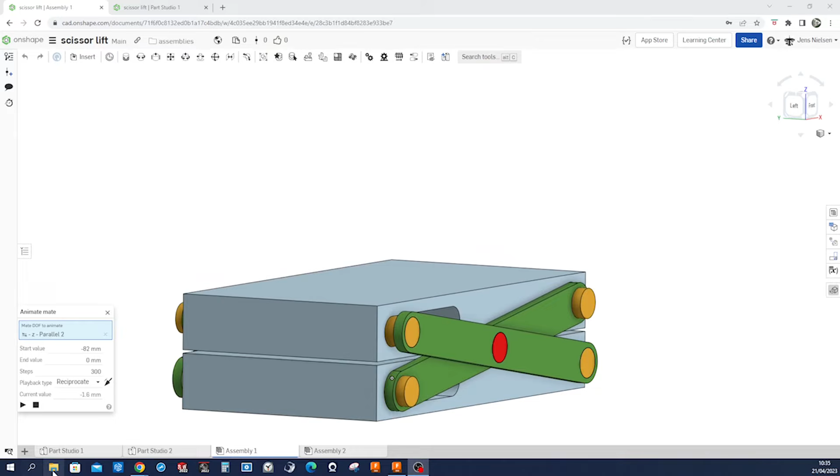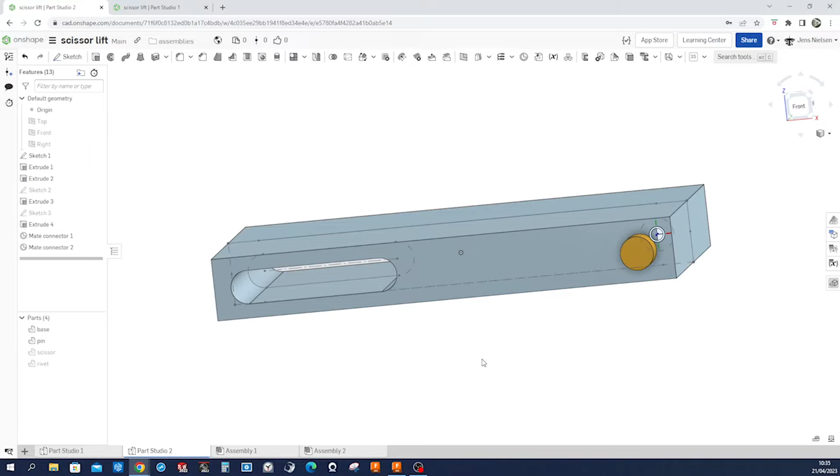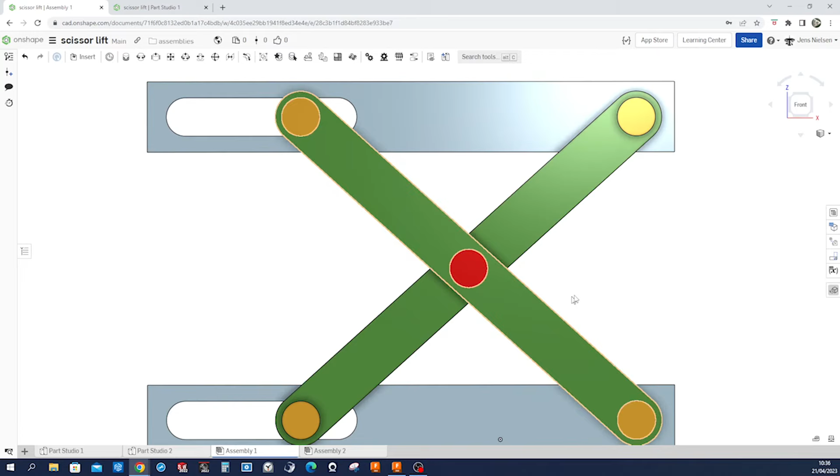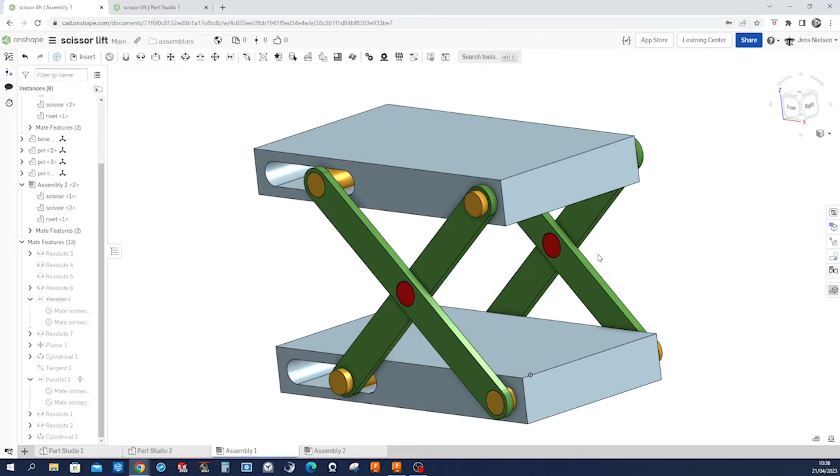Hello, let's model this scissor lift in Onshape. We will start in the Part Studio with simple sketches and create those 4 parts: the base, the pin, the scissor, and the rivet. Then we will go into the assembly, assemble those with plenty of mates: revolute, parallel, planar, cylindrical. Then we'll make a sub-assembly of those 3 and insert that at the back, and define the motion with a distance mate and parallel limits. We will define limits and the parallel mate.

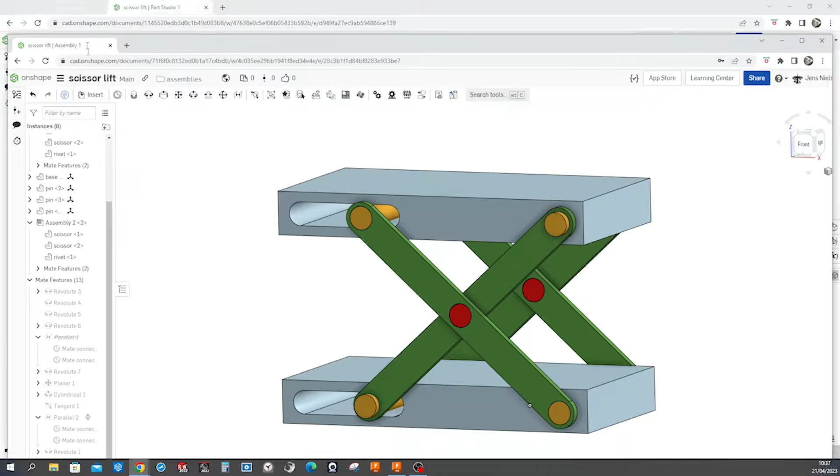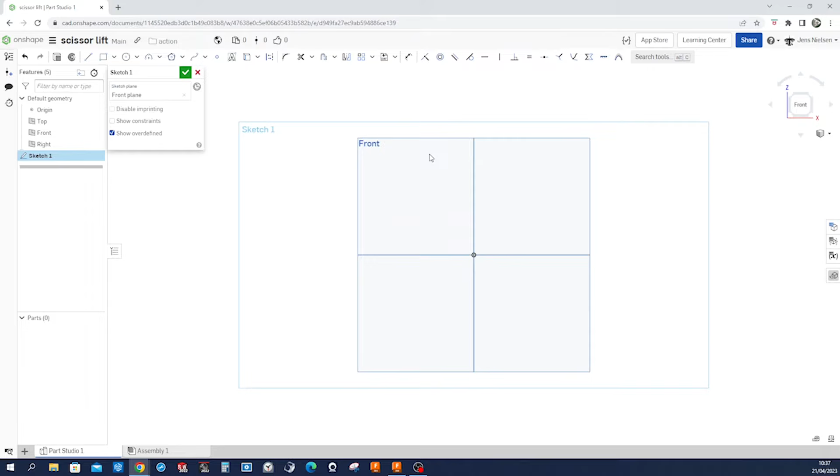All right, let's start in the Part Studio with that first sketch for the base. So I start a sketch on the front plane, N normal to that, P to hide the planes, and then a center rectangle from the origin. Dimension that with 166 and 22.

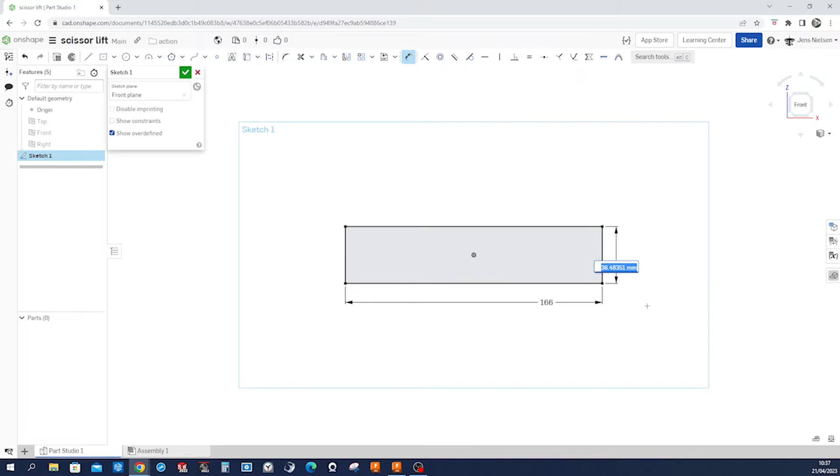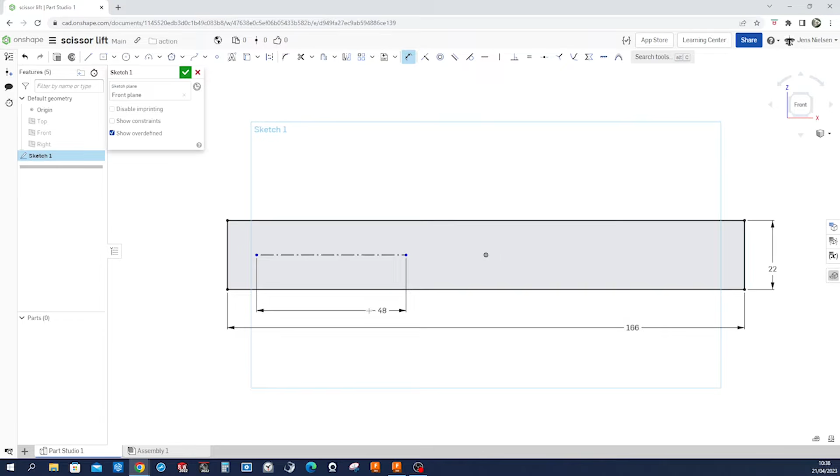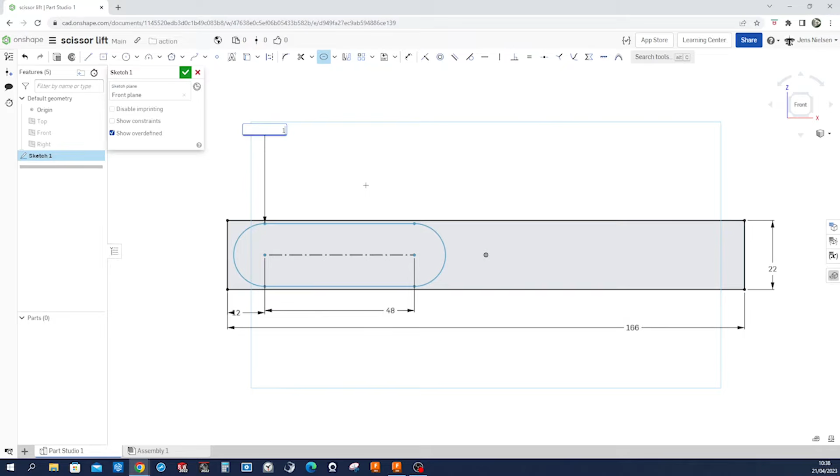Then I'll draw one construction line here, something like that. Dimension that, length 48, and 12 from the outer edge. And then I'll go into the slot command, take that, and give it a diameter of 12 millimeters. Then a circle over here. We can apply that same diameter here between those two, and that same distance, 12.

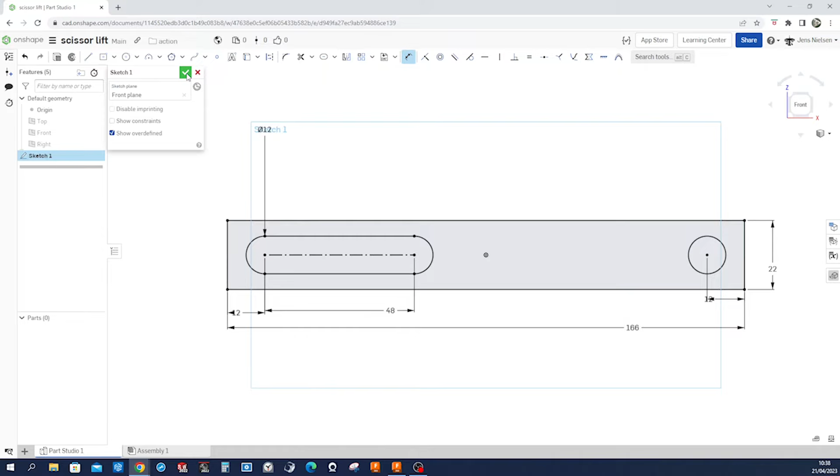All right, that's it. We go into extrude, take that region, make a symmetric extrusion of 88, and call that part base. And just change the appearance a little bit, a little lighter.

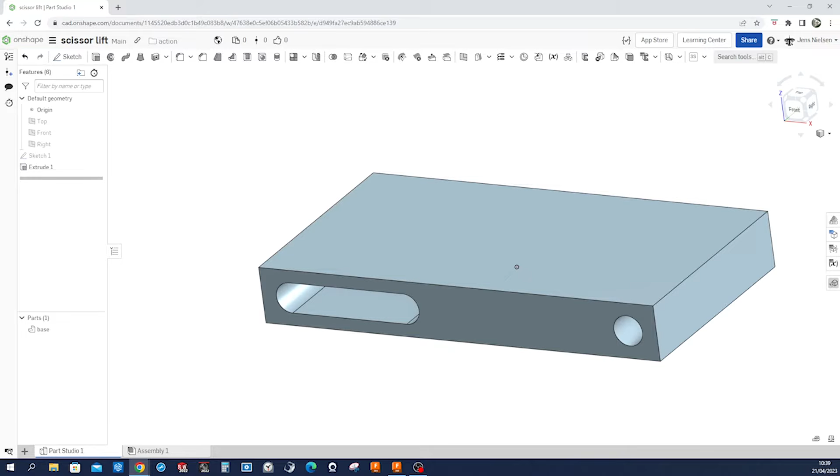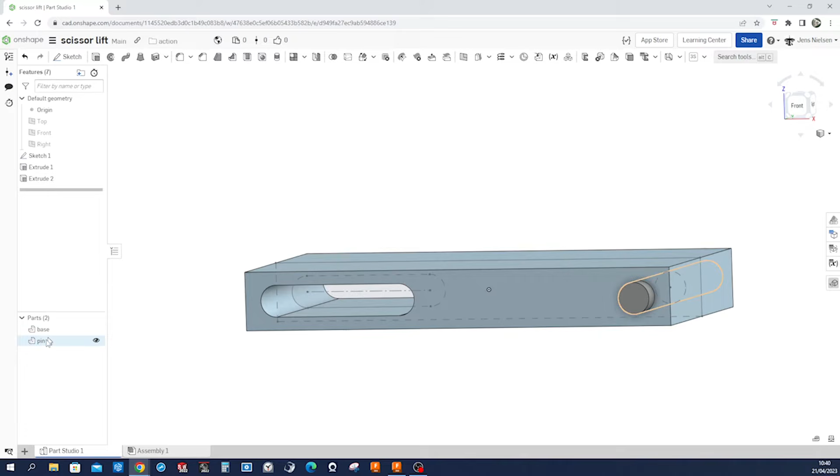So from that same sketch, we will extrude that pin. I take that region, say new, again symmetric, and that will be a 104 millimeter depth. Call that pin and give that some yellow.

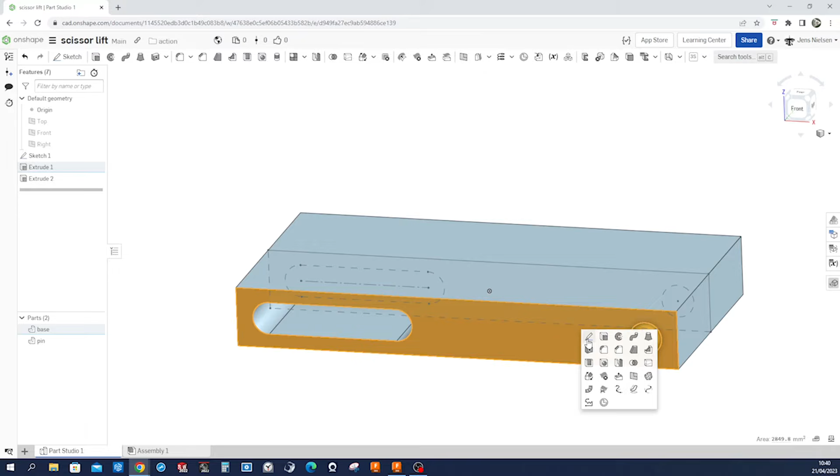Next is a sketch here on the front face, and that'll be just a line, starting at that center point of that arc and going to the center point of that circle. Make that a construction geometry. Project with U that edge, and over there we will just draw a circle constrained by that arc, and here a center midpoint constraint, make those equal again like that, and go back to that slot command.

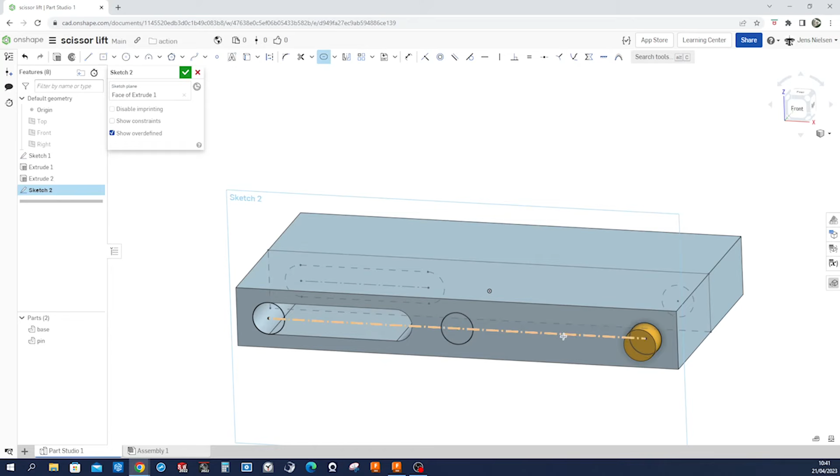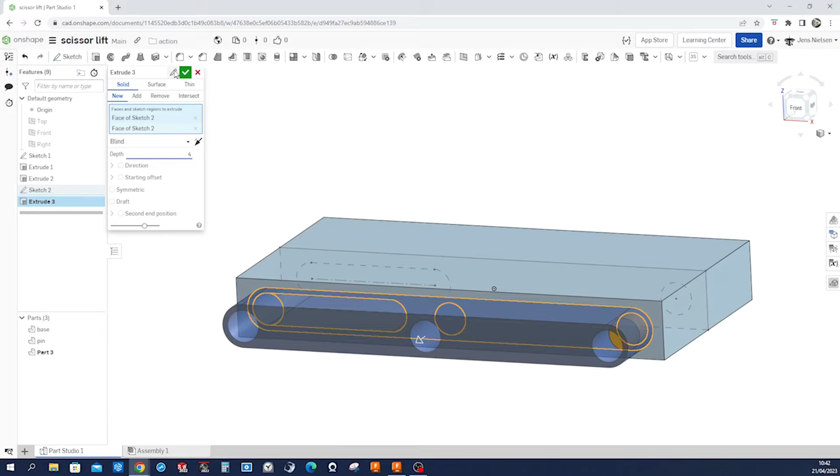Take that and change the diameter to 16. Accept that, and extrude that region here, including that one, 4 millimeters as a new solid.

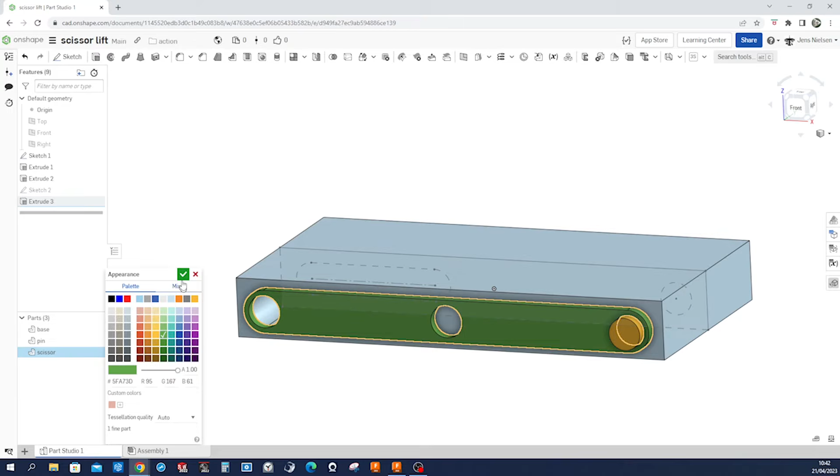I call that part Scissor and give it some kind of green here.

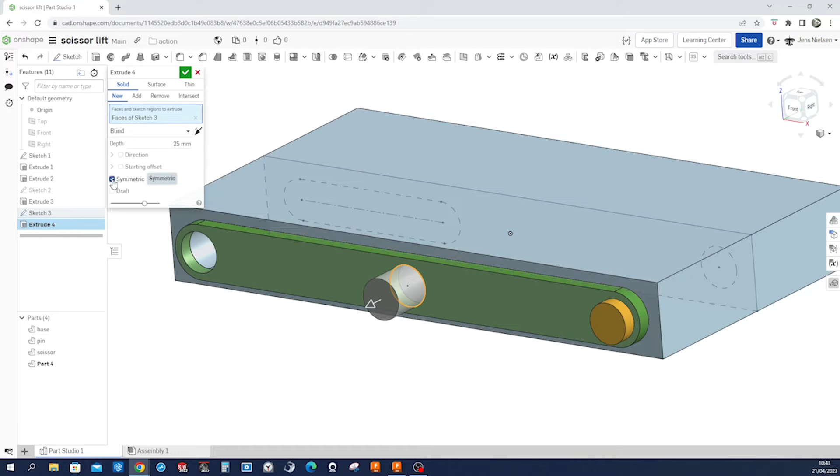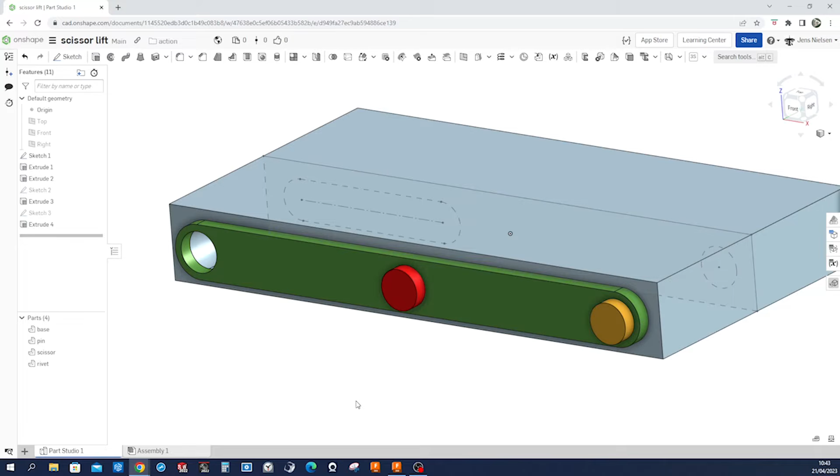So the next thing is the rivet. I take that as my sketch plane. With U, project that circle, and a symmetric extrusion of 8 millimeters. Rename that rivet and change the appearance to red. Okay, and that's it for the Part Studio, really.

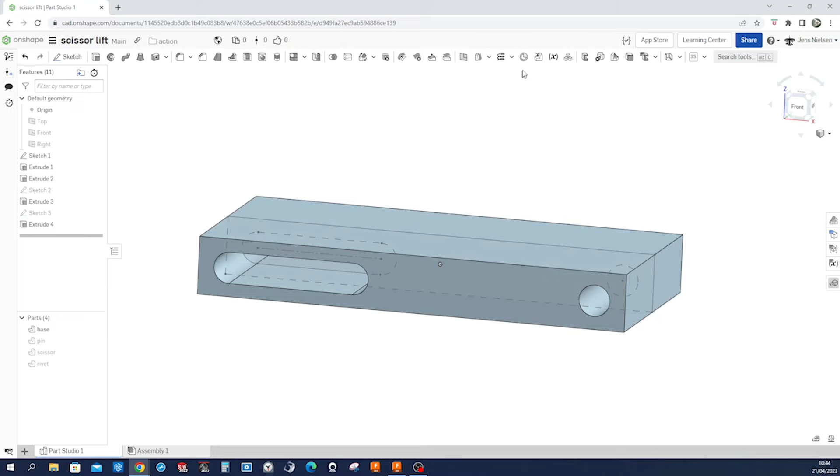Well, for convenience purposes, we can apply 2 mates in here. Let's hide those 3 for a moment and define 1 mate at that sketch point for that base. So I go into mate connector, take that edge here, that point. The owner part is that one. There you see it, the z-axis oriented like this.

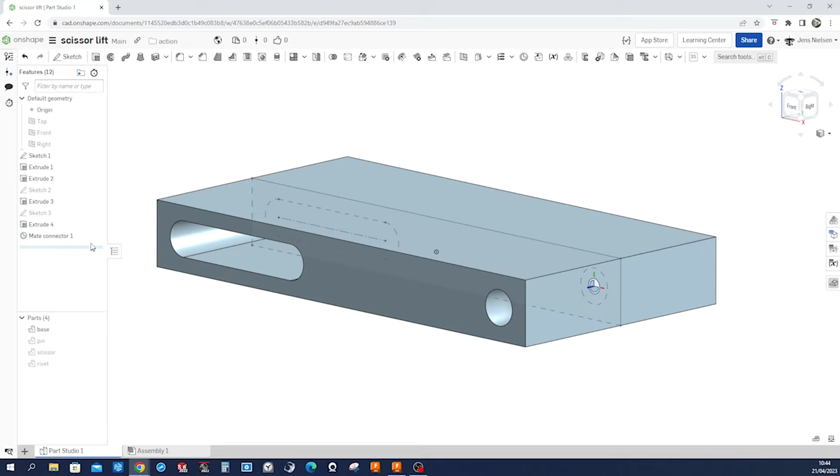Okay, hide that, hide our part and make that same thing for our pin. Here, owner part pin. Okay, great.

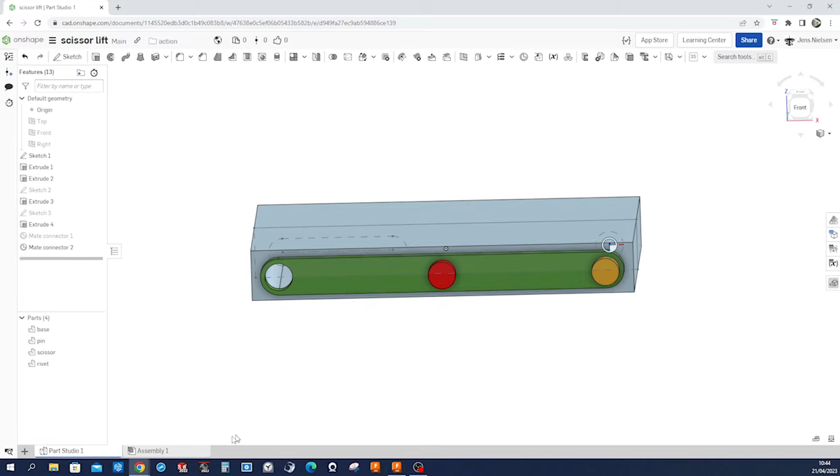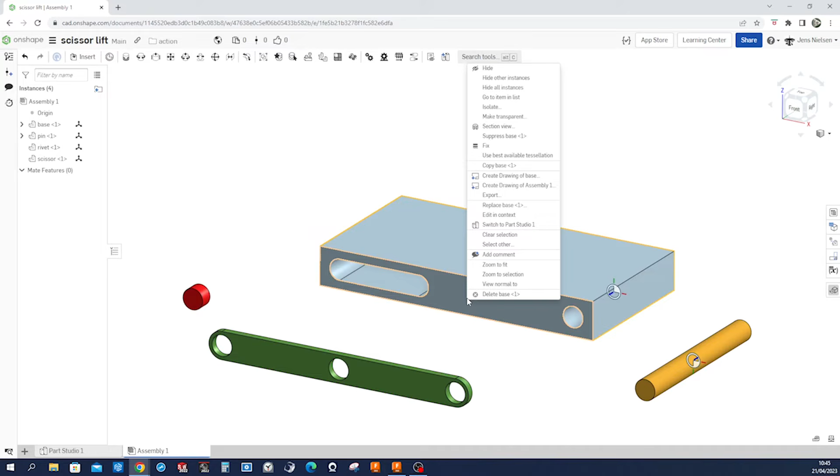So let's go into the assembly. Insert, well, all of that. Let's just pull things apart first. Go to that base and apply a fix to that. And then let's start with the revolute mate of that one and that one.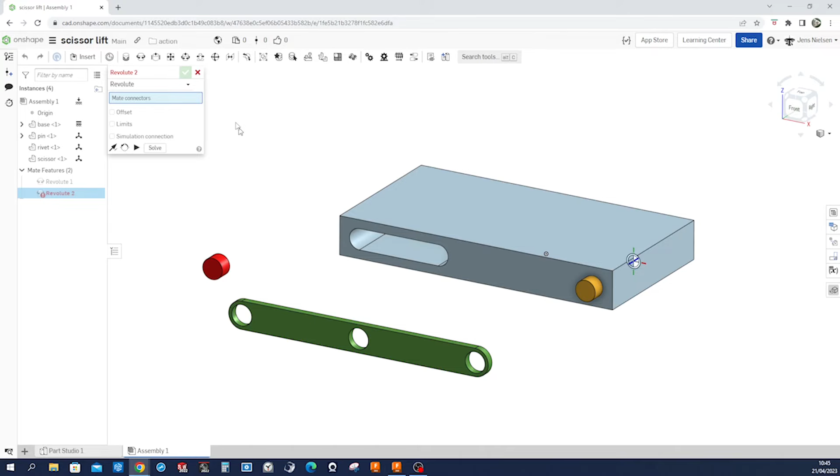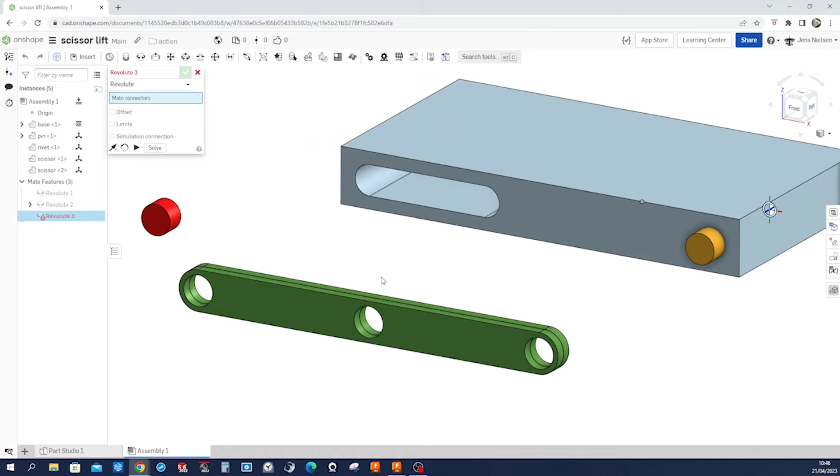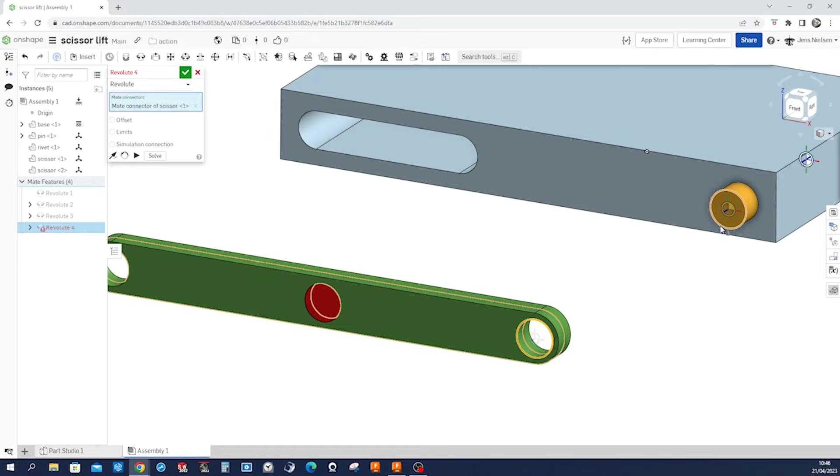Next I will just duplicate that component, Control C, Control V, and make a revolute mate by hovering over that edge here and over that one. And well, do that once more for our rivet here and that one. And now let's apply that revolute from that edge to that edge. Apply.

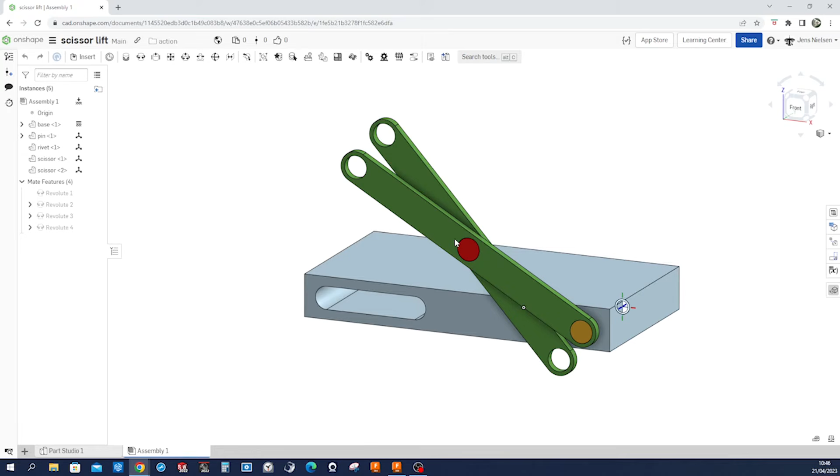Okay, let's exit that mate command and see. All right, so this is moving like that. That arm is moving like this.

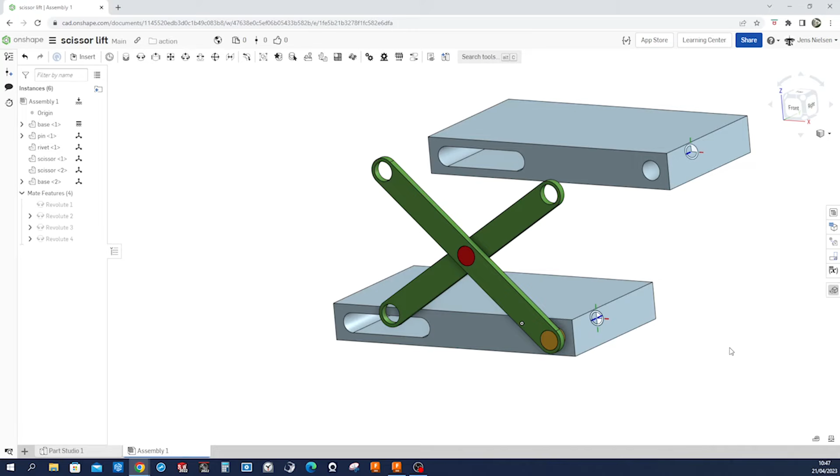So let's insert one more base. Control C, Control V. And apply that revolute mate here, so that edge and that one.

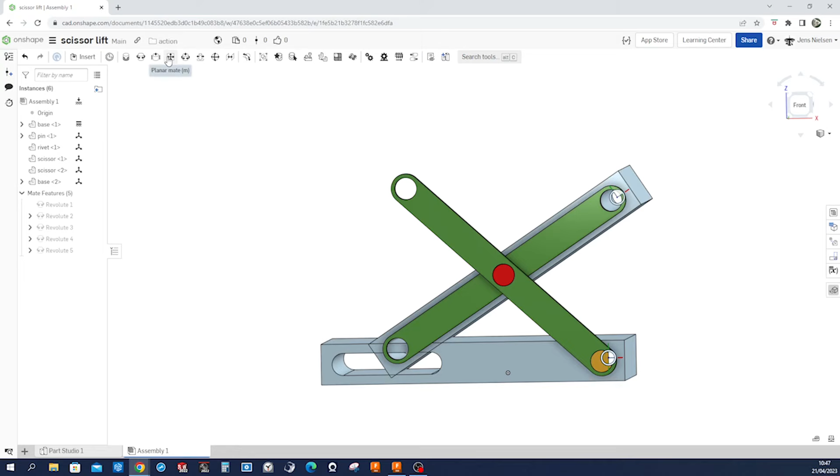And well, we could just, to get things oriented, apply a planar mate between that side and that one. Okay, so this is moving the way we want it.

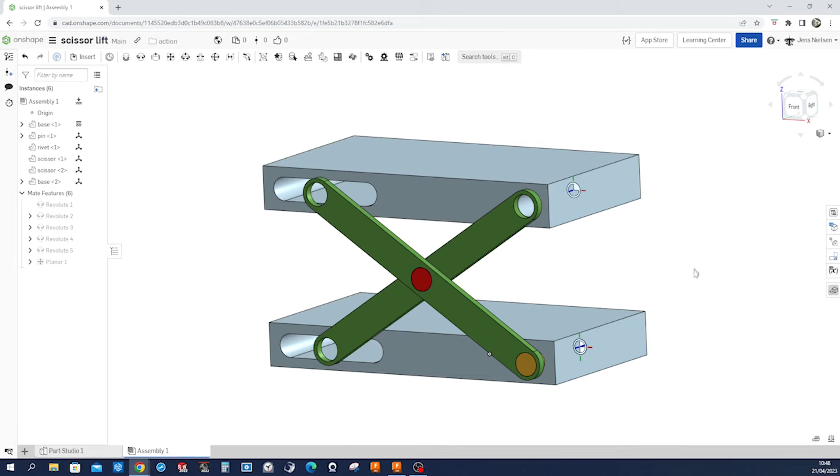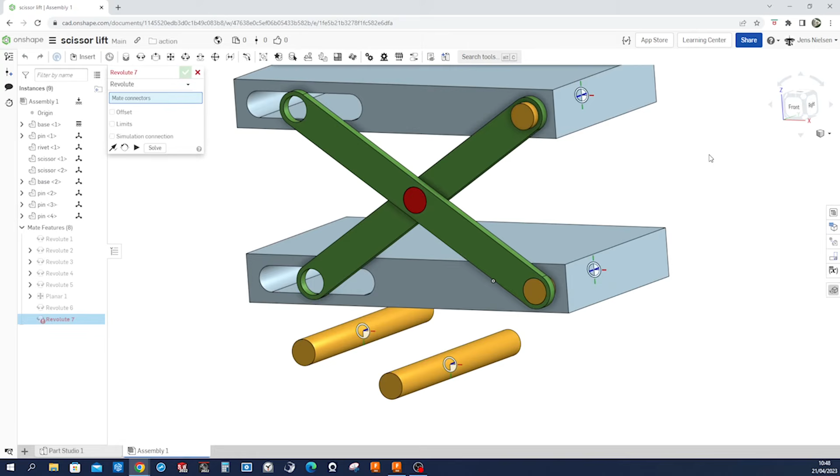And now we can copy that one, the pin, maybe just 4 times. And apply that revolute again here with that one. Ah, no, the top one, huh? That one here. Accept that. And one more time, that edge with that one. And we'll apply that once we insert that sub-assembly of those 3 here.

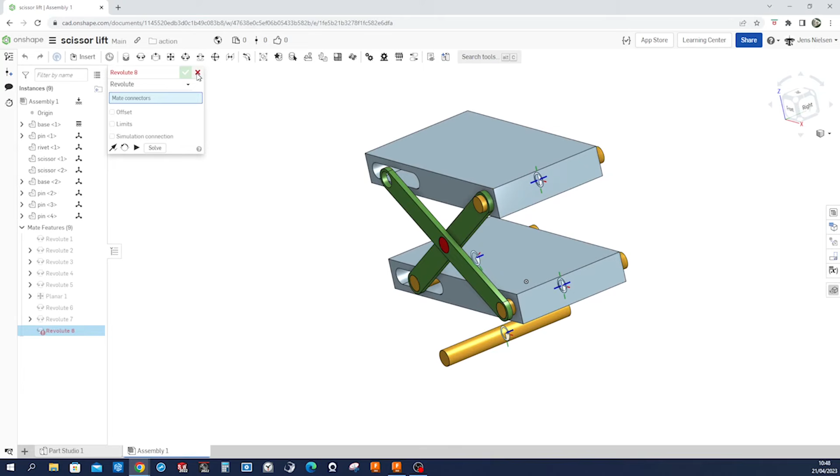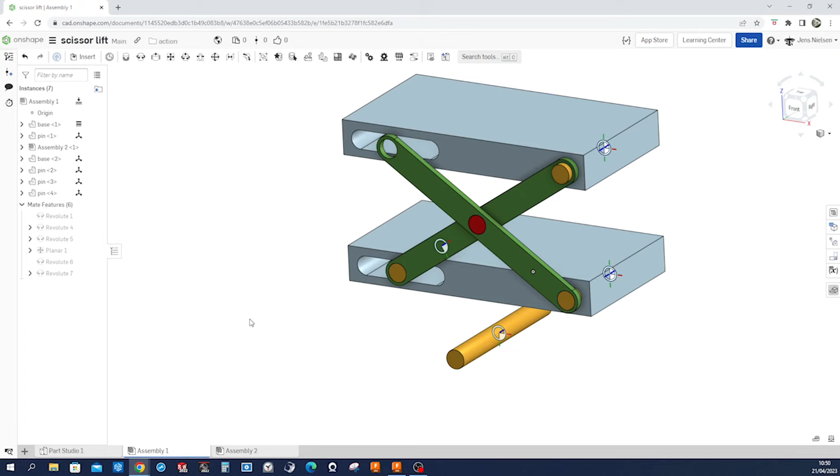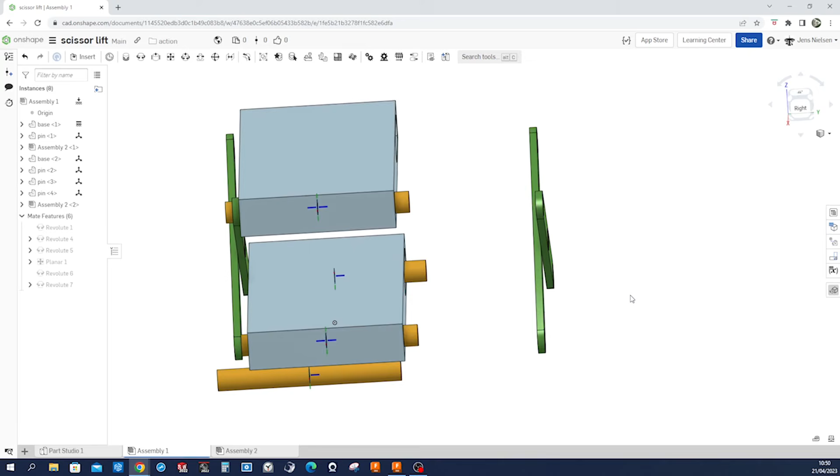All right, I select the 3 components, hover over that blue area, make a right mouse button click and go to move to new subassembly. So there it is, that assembly 2 within our assembly 1. I take that, Control C, and Control V. And the relationships we get between those 3 are copied.

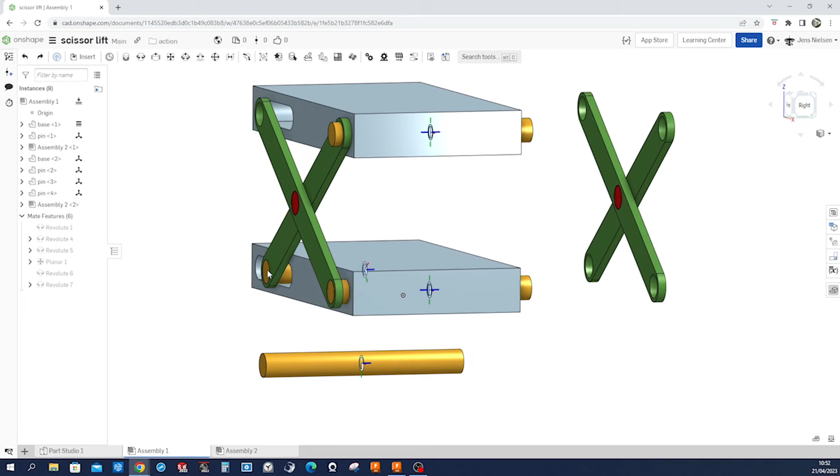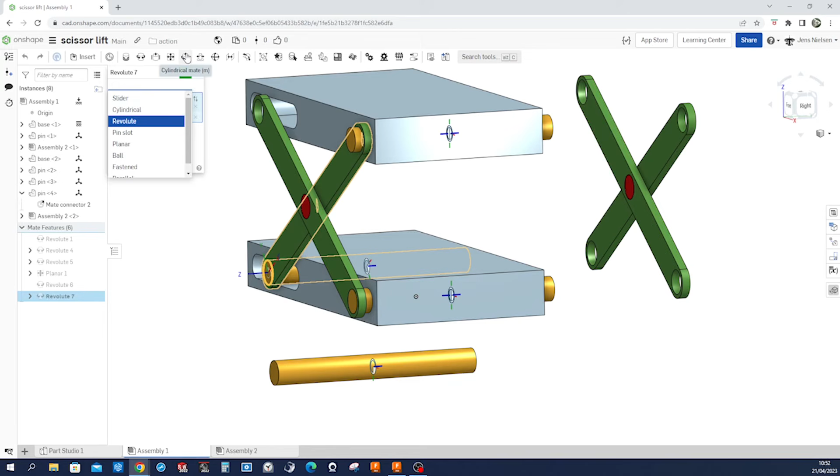Okay, before continuing mating those here, I need to acknowledge that I made a mistake, and that is the position of that pin here. With that scissor arm, that should be parallel with that, but we're going to have a look at that. That is this relationship, and we will edit that and change it from revolute to cylindrical. And that liberates that pin in this degree of freedom.

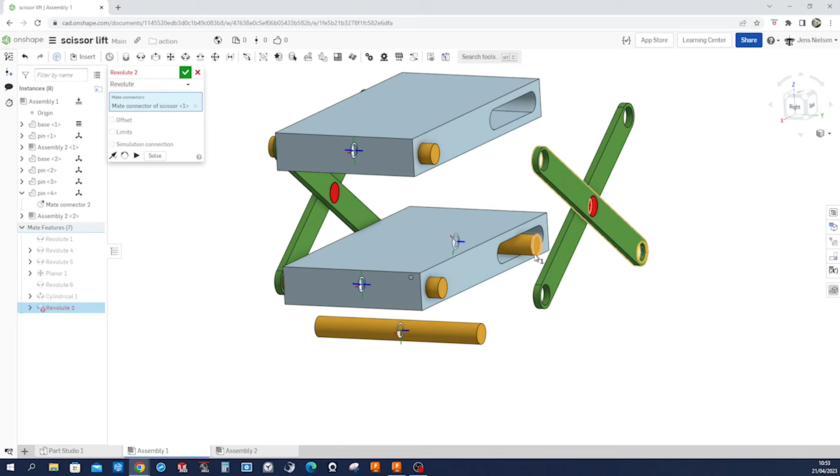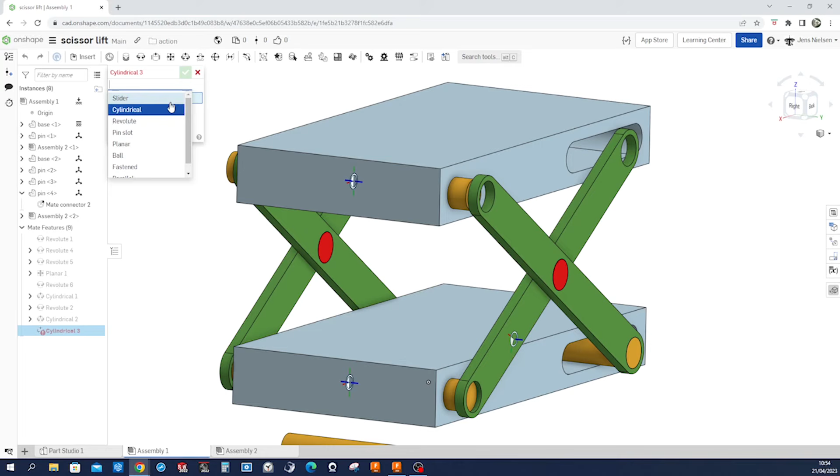All right, and now we will apply that mate here, that revolute mate. So take that, okay. Now let's use the cylindrical mate to mate those two here. Solve that. And sure enough, revolute mate of that edge and that one here.

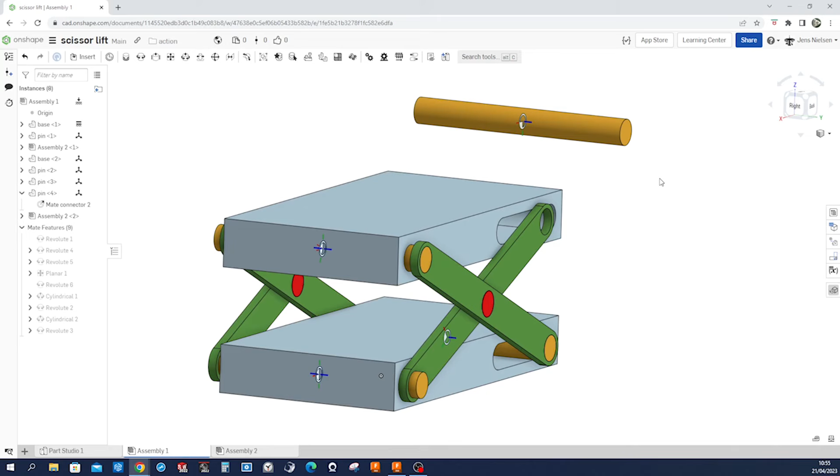So we still got that one here. So apply revolute mate here, from here to there. So let's see. Things are moving the way we want, but we see there is that collision, that interference.

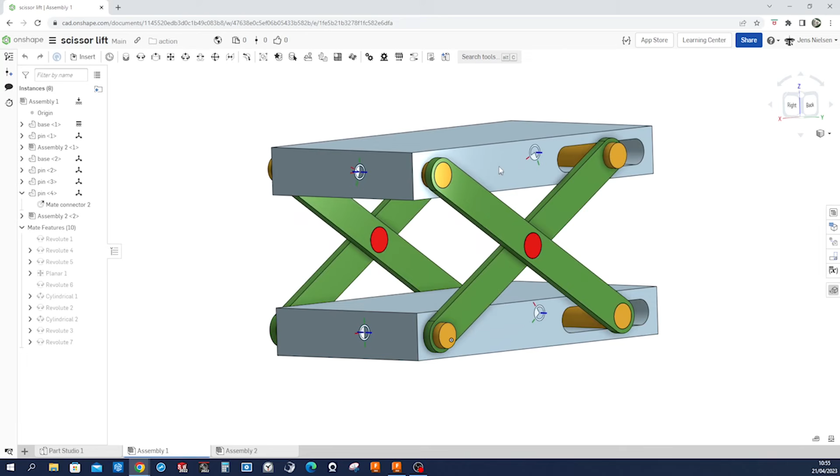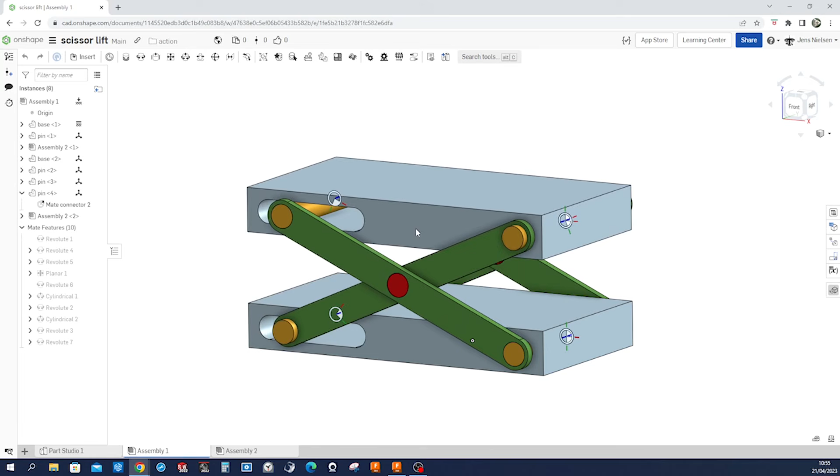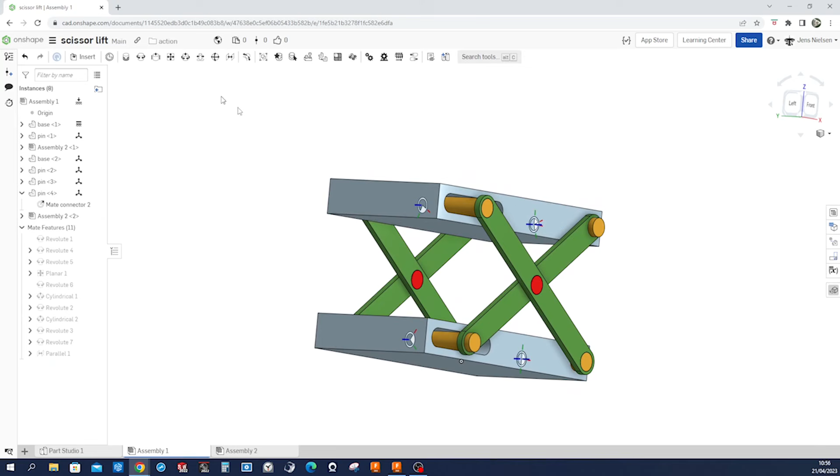So that is what we're going to define with the parallel mate, and then define the limit within that parallel mate. So parallel, that is here. Take that mate connector here. Take that. Accept it. And let's see, okay, nothing has changed so far.

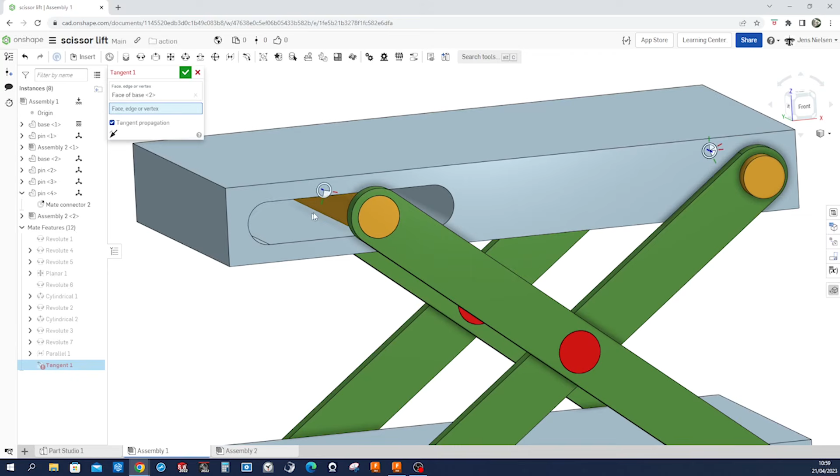So let's analyze how far we can go with that pin in that direction before it collides here. And we can do so with the tangent mate. Take that face with the tangent propagation. Take that one. All right, that might have gone the other side of the face, so turn that around. Let's see, so all good, all good.

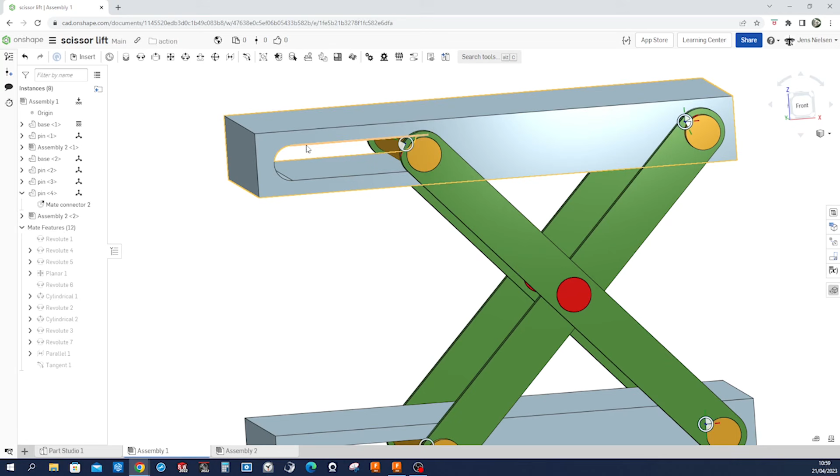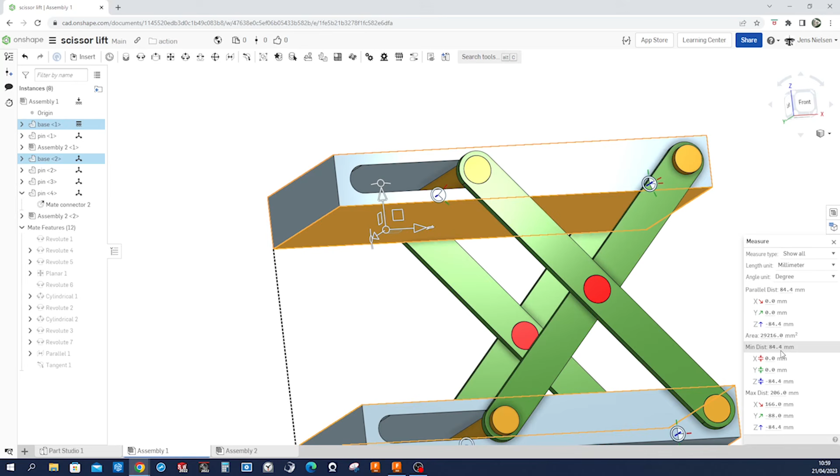Go up till here. There, huh? Let's measure that here. Take that face, take that one. There is a distance of 84. Minus 84. Okay.

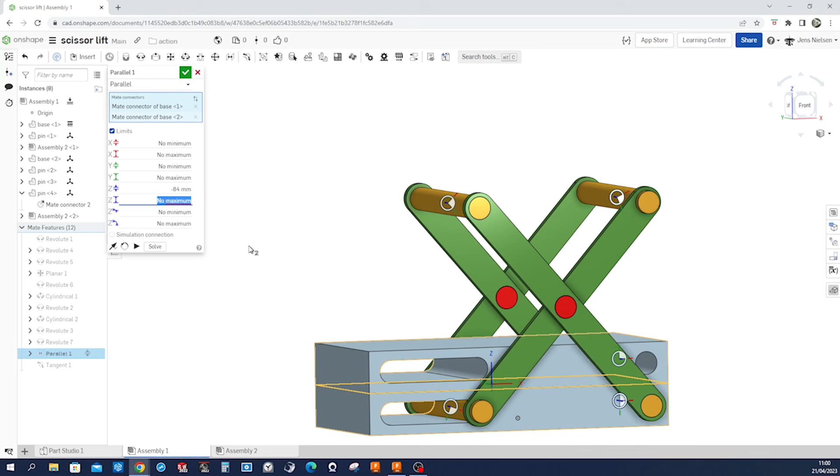So we get our parallel mate here. Let's edit that with limits. And so I type in minus 84. Maximum is 0. Accept that.

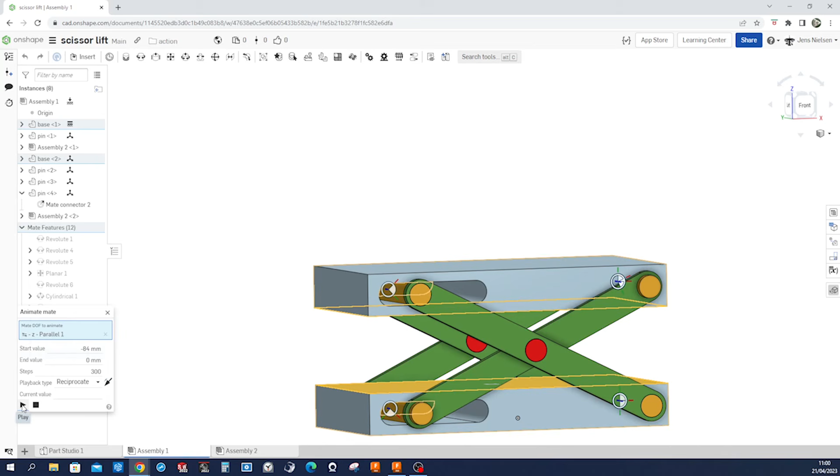And now let's go into right mouse button click on parallel 1, animate. Take that Z axis here. We see start value, end value, steps 300, that's the speed. Reciprocate, sounds okay. And there it is.